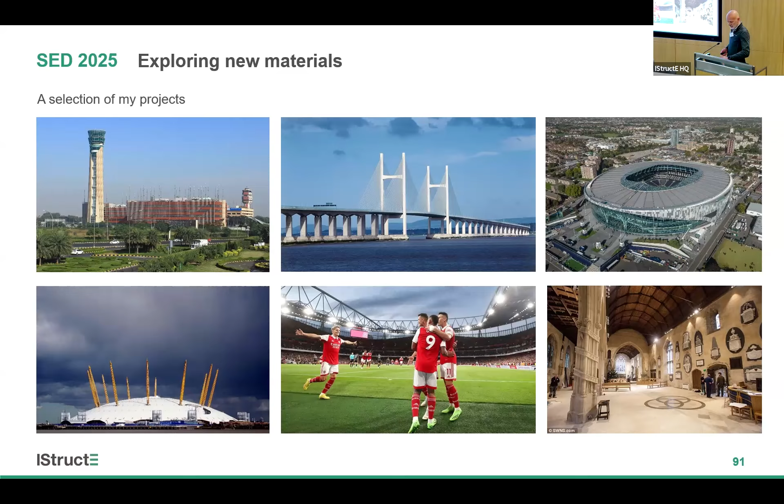So to start with, just a slide showing some of my projects, which of course I'm very proud of. Mostly concrete and steel, some timber. So that's my experience as a director at Buro Happold. But really, my curiosity around structural materials has led me to this question.

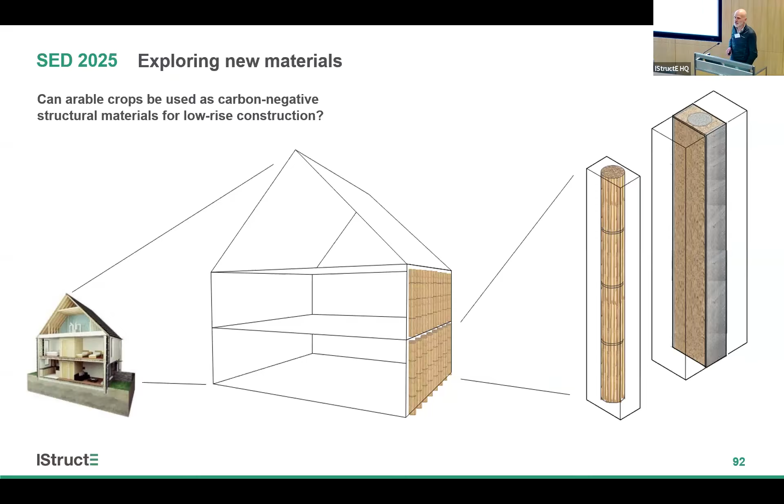And you might want to ask, well, why arable? The reason for that is that I believe it's a safer bet when we want to find materials that allow the sequestered carbon if we lock them into the building. So the graphic shows, if you like, a diagrammatic design of bundled natural arable crop, which combines both structural and thermal.

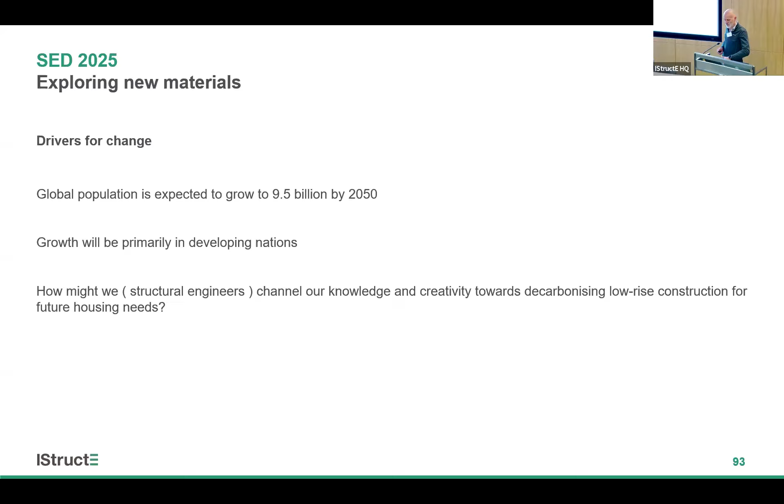So what are the drivers for change? There's going to be lots of construction in the next few decades. We know that population growth is going to rise to 9.5 billion by 2050. At least that's a projection. So that's around about the population of the UK every year for 25 years. Most of that's going to happen in developing countries. So how can we, as structural engineers, use our skills to tackle low and medium rise? Because there's going to be a lot of it.

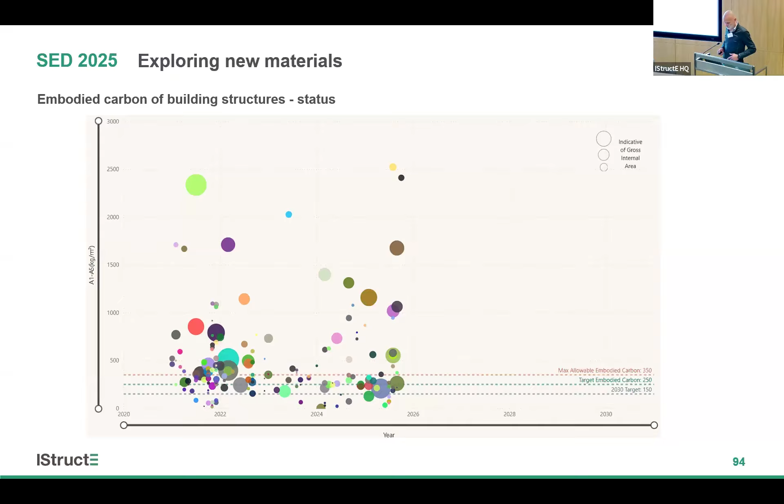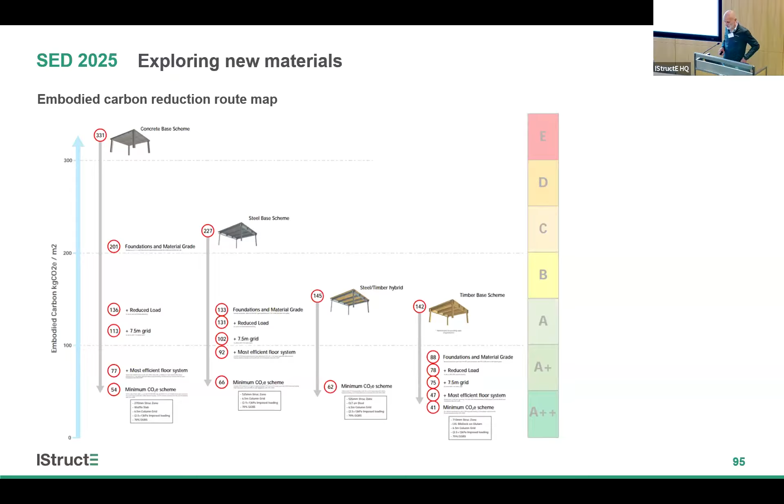Around about Engineers Declare, which was 2019, we started to strengthen our links with academia. For me personally, that was with my local university up at Bath. I set up a research pilot whereby we suggested dissertation titles for students and then supervised those students. We also set up a facility for employees to undertake PhDs, which has gone very well. And I do believe that industry and academia need to work together to tackle climate change.

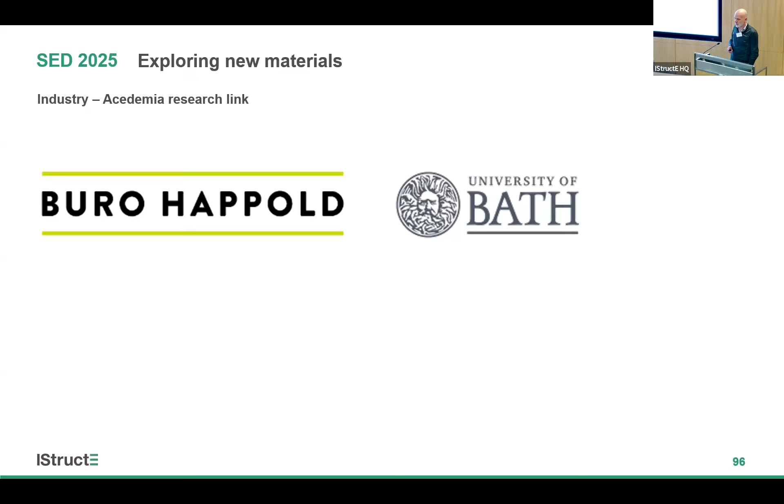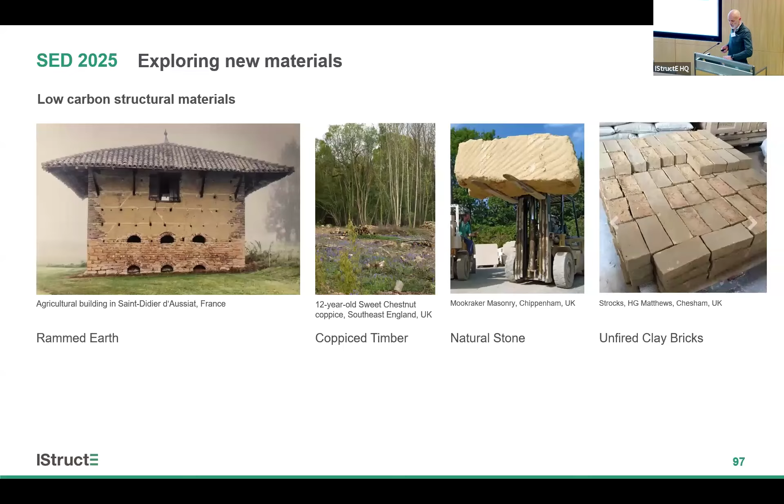At the same time, I decided to reduce my hours and started working part-time for a number of reasons, but one of them so that I could explore natural materials. So what are those natural materials? Current options, we've all heard about them: rammed earth, coppice timber, natural stone, unfired clay bricks. There are others, and we should be pursuing these. But even these have a carbon and biodiversity footprint.

And then when we look at timber, I've just been having an interesting conversation about whether we can include the sequestered carbon in timber. Our approach is that we don't include sequestered carbon, but I know that it's a topic for debate. If you haven't already read Will Hawkins' report on timber and carbon sequestration, it's really good. It's worth a read. It's on the IStructE website.

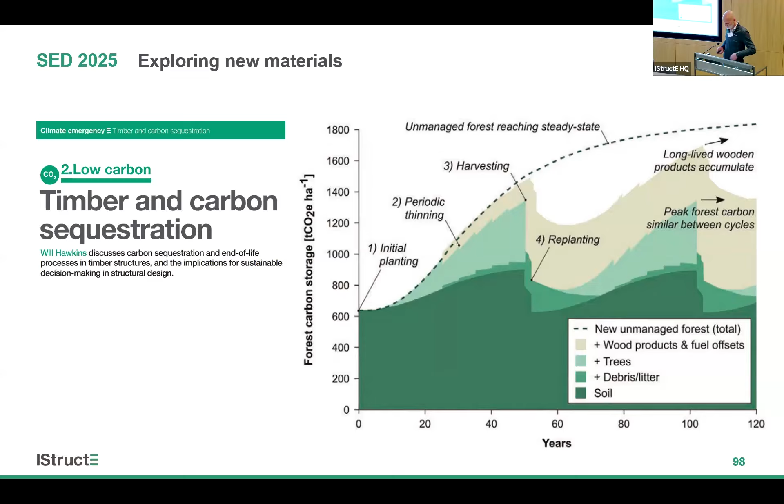And then when we look at regenerative design, that steers us to ask this question: how do we regenerate climate and biodiversity loss? How can we reverse that? Not only reduce, how do we reverse that? That's a hard question, but we have to try and find solutions.

Most of our materials are in the bottom left quadrant, even the green and sustainability movement. If we take those approaches, we're still in the bottom left quadrant. How do we move up into the top right quadrant? And my interest, if we just look at materials, is what materials might occupy that top right quadrant? I think plant-based materials are the obvious answer to that, and so that's been my focus in recent years.

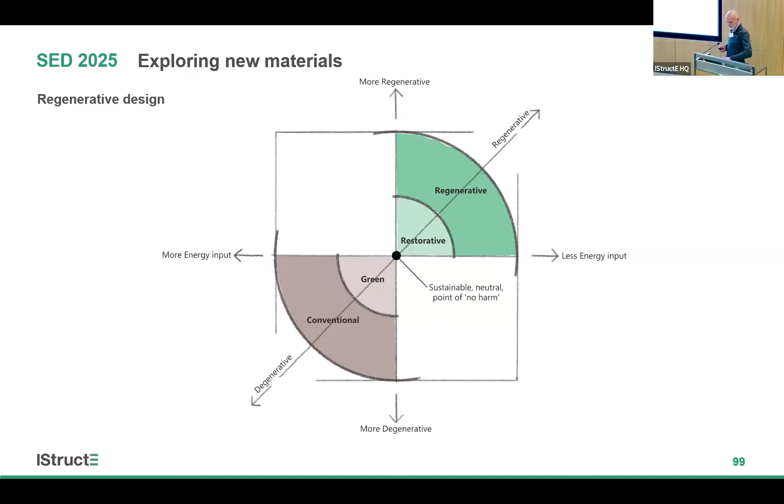So what are the precedents that we can look at for plant-based structures? The Iraqi marsh Arabs, amazing parabolic structures using reeds for thousands of years, really interesting. And then other indigenous communities around the world, South America, Peru, have similar structures using reed, Africa. And then more recently, we see these structures using canes and bamboo, and of course we all know the Arc project, but bamboo isn't naturally durable.

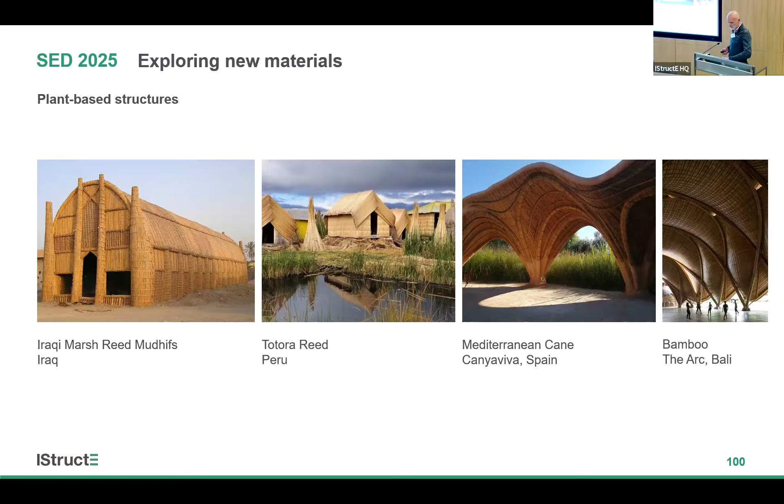So how about the crops in this country that we are familiar with? Of course we know about straw, but we can't really take straw as a serious contender structurally. And then of course there's been a lot of interest recently in hemp, and quite rightly so, but it's quite soft, and actually under sustained load it strains a long way, so it's not really going to give us the answers that we need.

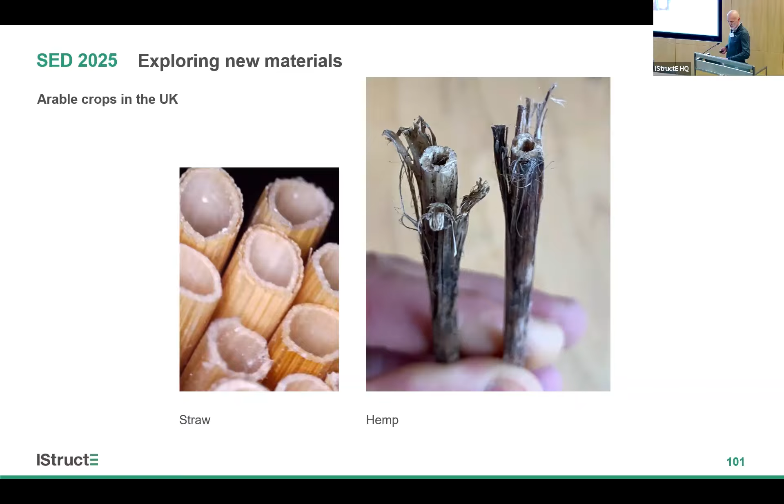So miscanthus, this is the material that I've been focusing on. It's growing in popularity in the UK. First came to the UK probably 20 or so years ago as a biofuel. More recently as a growing market as animal bedding, chopped up and used as animal bedding. And as I said, this has been my focus, and hopefully will be my focus for the coming years.

So what is it? So this graphic just looks at a comparison with bamboo. So a small stalk of bamboo. So bamboo is hollow in the center. It has this outer timber-like structure. It's strong. It's not durable. Hemp is insulating, it's not strong, it's not durable. Miscanthus kind of combines the two. It has this outer cylinder of timber-like structure, so it's hard, and it has this inner shiv-like insulating material, and it is durable.

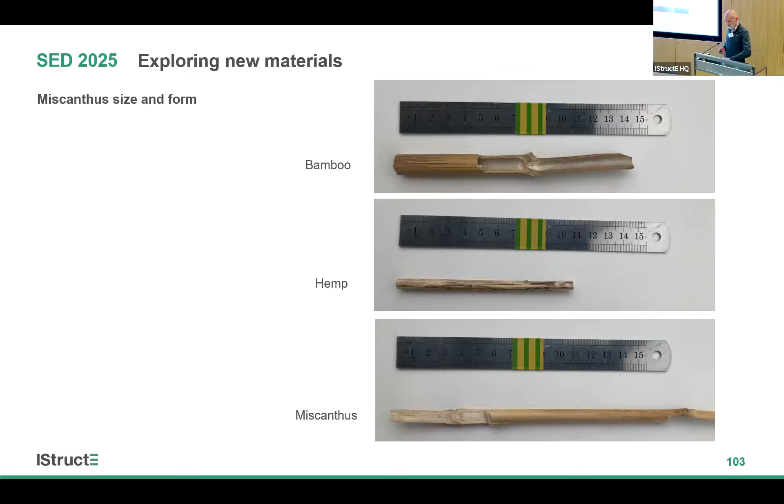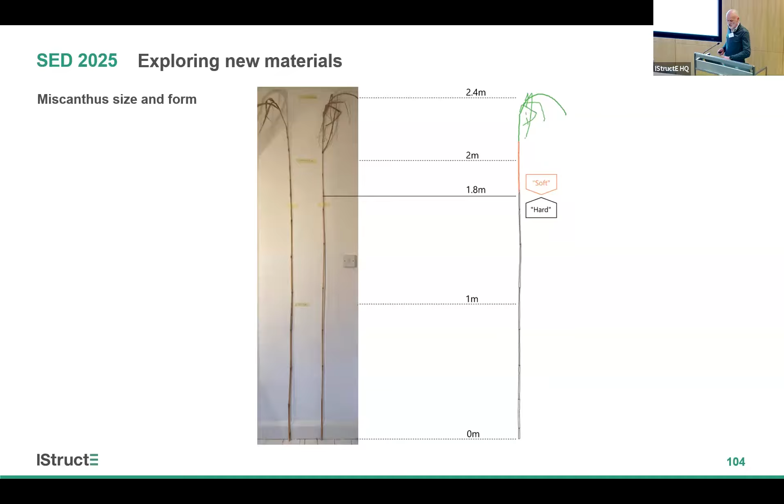So it grows to around about 2.4 meters in this country, 2.4 to 3 meters-ish. And around about 1.8 meters of that is usable, i.e. it's hard. The top section is quite soft. It's part of the C4 photosynthesis group, which means that it photosynthesizes almost twice as fast as other plants. It's a coppice crop, which means that the rhizome roots stay in the ground. Every year it gets harvested, and those sequester carbon into the ground as well as the stalk. And then next year, the crop grows from the rhizome roots.

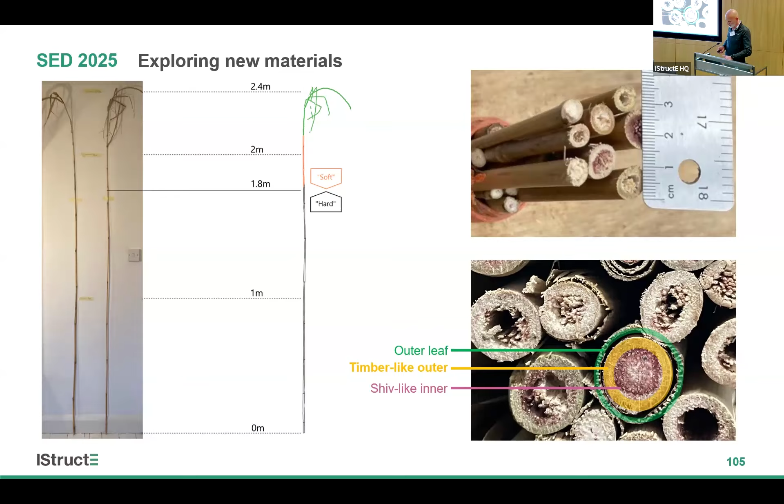In cross-section, it looks like this. The stalks are around about a centimetre or so. And you can see there in the graphic, there's a kind of green outer leaf, which comes off quite easily. And then you're left with a timber-like outer cylinder. It looks very similar to bamboo. In fact, it looks identical to bamboo. But inside you have this insulating shiv.

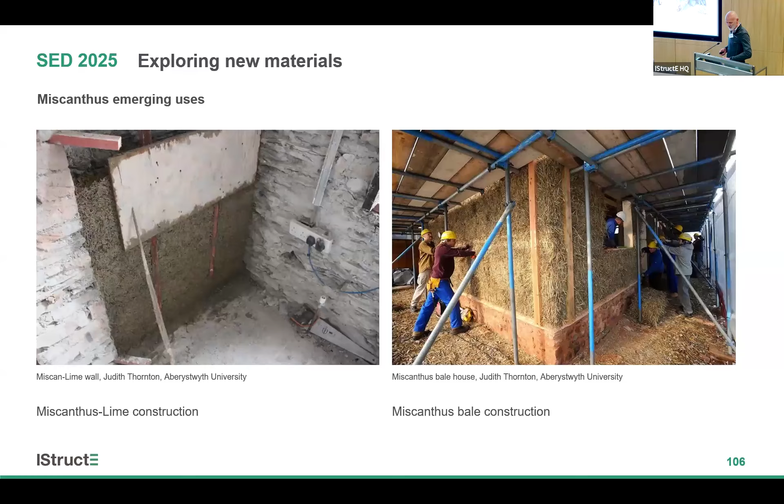There are some good historical precedents of its use. The Japanese have been using it for thousands of years as roofing thatch. Also, Japan has a damp marine environment similar to our own, and it's very good in damp conditions. It has enough lignin and silica in it to make it naturally durable.

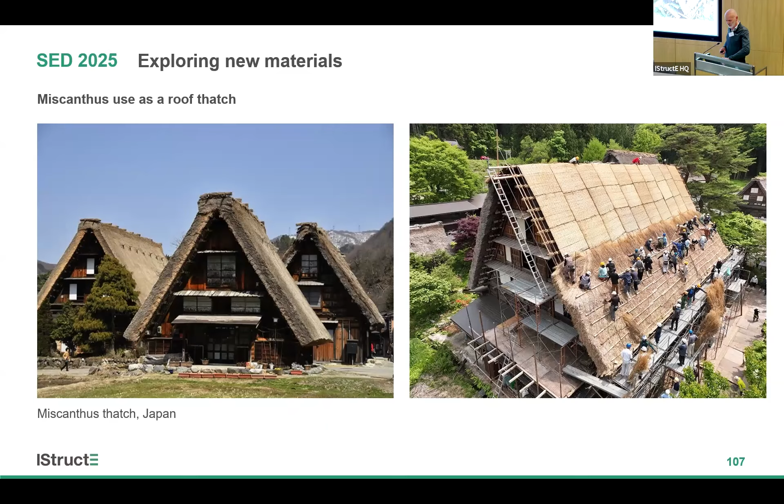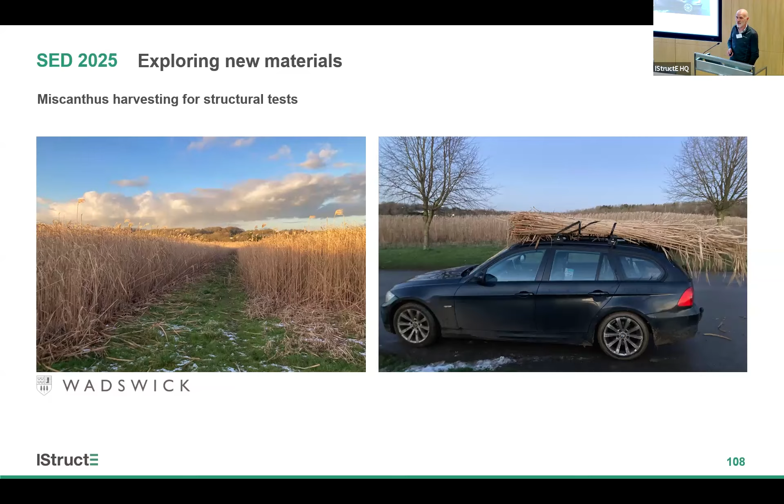So around about this time last year, I set about harvesting some miscanthus to play around with it, and found a miscanthus farm about 7 miles from my house, Wadswick in Corsham, Wiltshire. And they were very happy for me to have some, although puzzled as to why I wanted it. And then I went about drying it for a few months, and thanks to my wife and kids for allowing me to lay miscanthus out on our underfloor heating.

So we dried it and tested it in actually my greenhouse to begin with, just some fairly rudimentary tests. And so this shows the test of 8 upper stalks and 8 lower stalks, bound together with polypropylene confinement, tight, just to understand whether I could transfer the load through friction, and managed to hold a kilonewton of load on the 8 stalks before it started to slip. So that kind of gave me confidence that, okay, this potentially is a material that we could use.

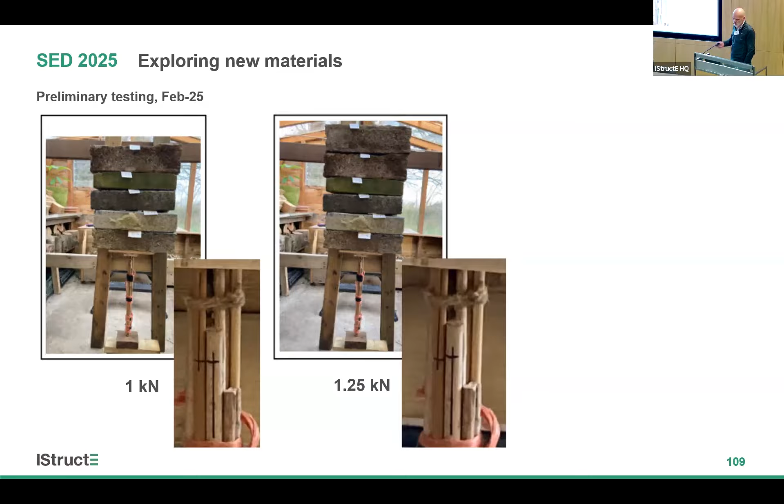And so then I suggested it as a dissertation topic, going back to the Bath University link. And so the dissertation student took some tests with my supervision. This is just one of the tests. So this is just a simple single stalk. You can see the wood-like fibre at the top right, the failure. We managed to generate 3 kilonewtons of load, which is actually quite a lot of load. And when you spread that over the wood-like outer cylinder, that equates to around about 50 to 75 megapascals. So actually it's quite a high stress.

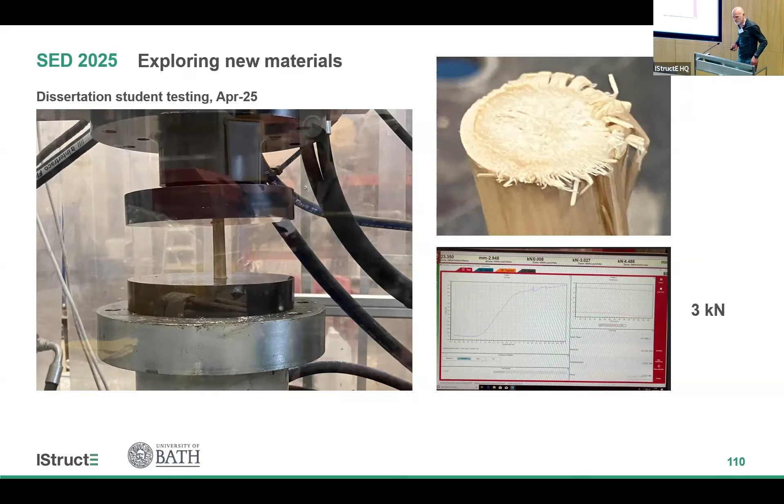And then we also did bundled tests, and these weren't successful. Well, only in that we realized actually each individual stalk was buckling individually, and the sisal confinement that we were using just wasn't doing the job of helping those stalks to work together as a whole. So somehow we needed to improve the interface friction.

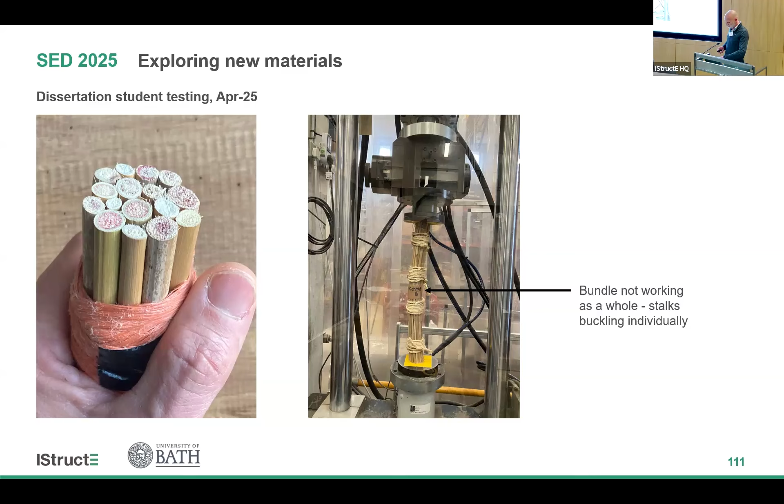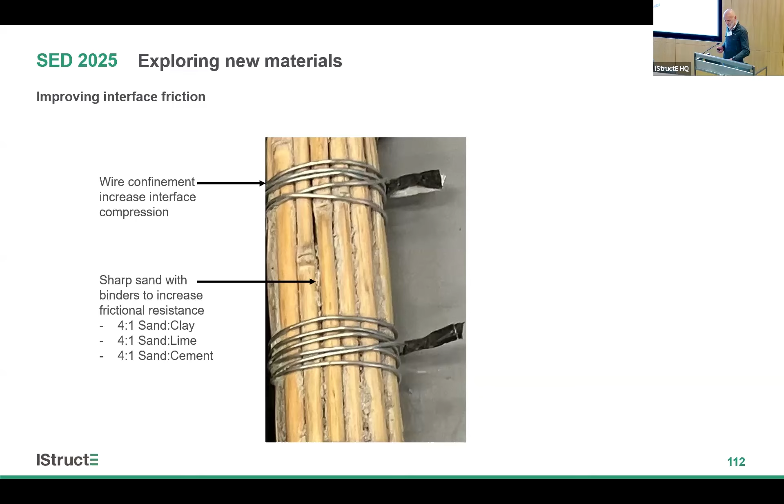And then this summer and autumn, in fact only very recently, we've run some more tests, and we spent a few months trying to work out how to improve the confinement. We came up with a tensioned wire system, works really well, digs into the wall of the miscanthus on the outside and really compresses the bundle. So that works really well. And we also wanted to include sharp sand in the interface between the stalks. And obviously we needed to hold that sharp sand in, so we used a binder. We used 3 different types of binder: clay, lime, and cement.

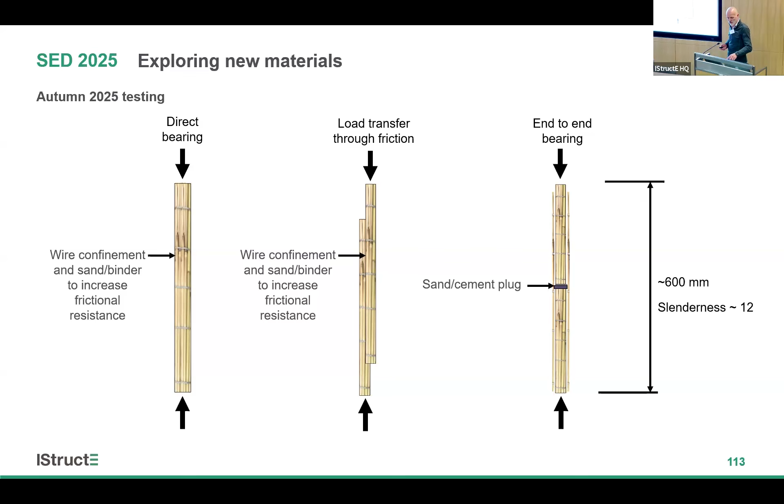And we undertook 3 basic tests. The first one was direct bearing, just stalks from top to bottom, again with sand binder within. And the second test was a friction test. So we had a bundle at the top, bundle at the bottom, interlocking, so the load transferred through friction, through the sharp sand and the confinement. And then the third test was just a simple end-on-end bearing with a sand cement plug. These are the test samples, and these are the results.

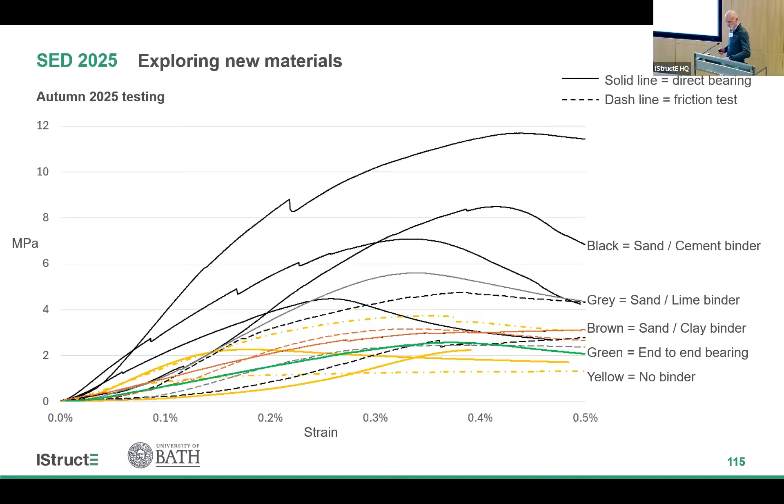So on the left-hand side, we have megapascals. X-axis is strain. Solid lines were the direct bearing tests. The dashed lines were the friction tests. So as you can see and expect, the solid lines, the direct bearing tests, were obviously better. The dark black lines are using cement binder. We're not serious about cement binder, but we wanted to use it to try and get a feel for how the strength of the binder changed the result.

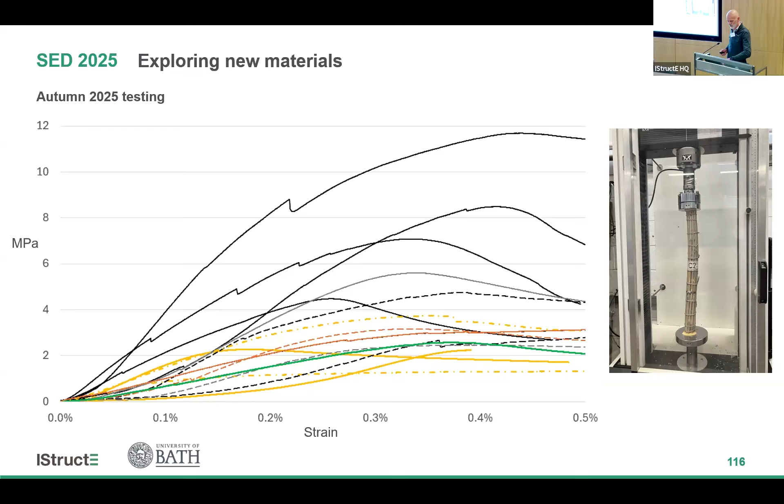And all of the tests failed in buckling, and actually that was quite encouraging, because what that means is when these bundles, you can imagine them being part of a building, part of a wall, the fact that they're joined together adjacent to each other is going to increase their buckling resistance. So these allowable stresses will probably increase.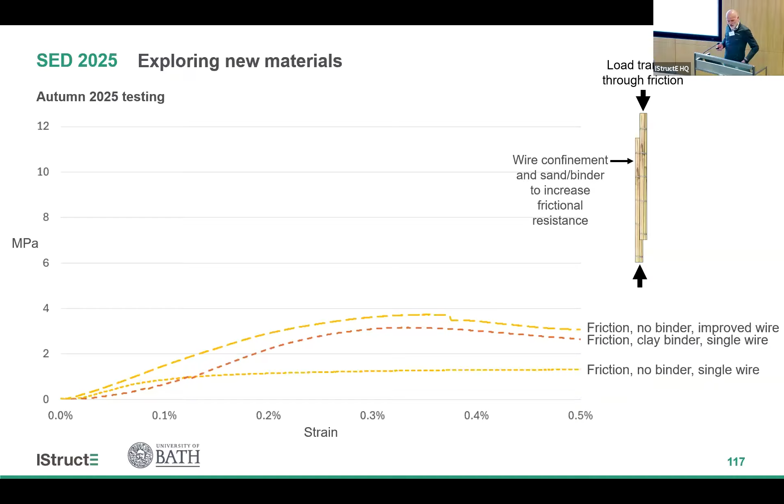So let's just put that into context. How much stress would a 2 to 3 storey resi building put on a 300 millimeter wide wall? And actually it's quite small. It's very small, around about 0.1 megapascals. So actually the loads that we were getting out of Miscanthus are way in excess of the kinds of loads that we would expect, which is good.

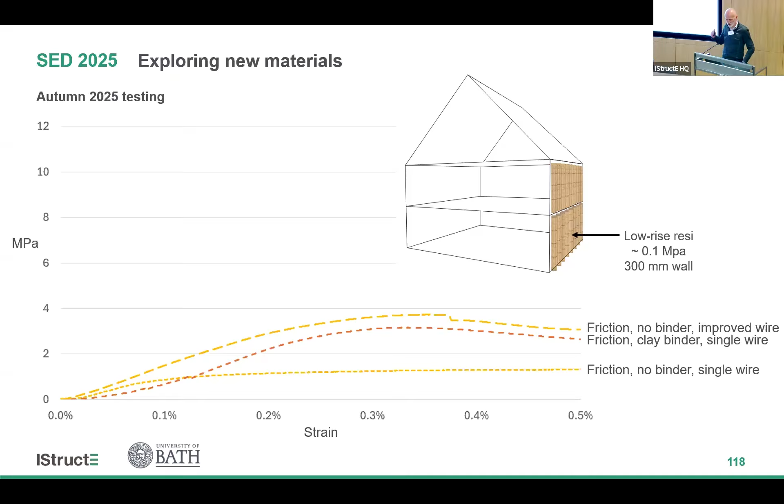Just again, putting it into context, rammed earth is considered to be around about 1.5 to 2 megapascals. So the line at the top there is double that. So not bad. We also did thermal conductivity tests, and the result of that is that actually, yes, pretty good, as we expected. Very similar to straw bale and hempcrete.

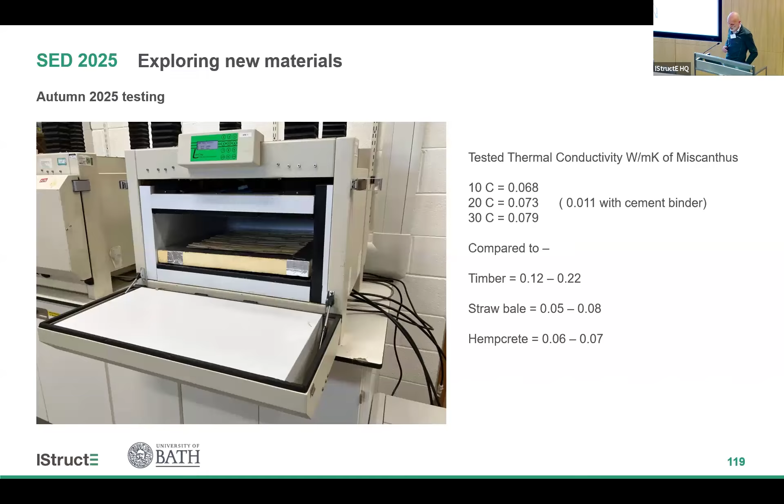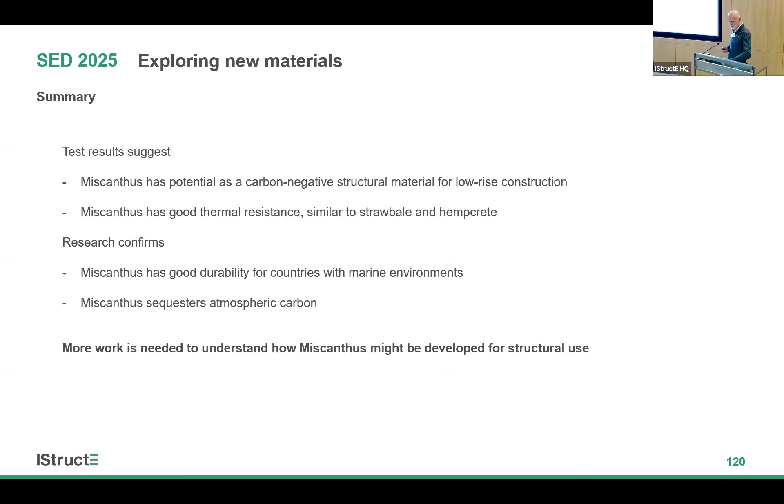So, in summary, it is a potential material for structural use in the future. Obviously, there needs to be more work done. It has good thermal resistance. It has very good inherent durability. And we can use the sequestered carbon because it's an annual crop. There is more work to be done.

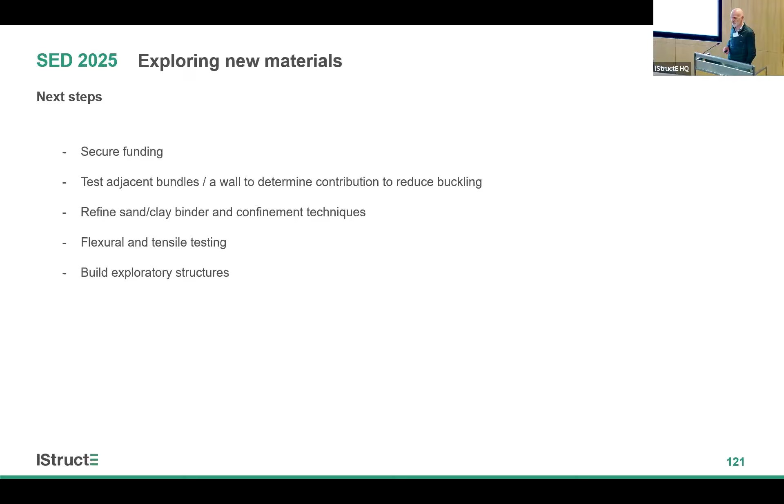So the next steps: first of all, I need to secure funding for the next stage of the project. And we'll be doing more tests, bending tests, tensile tests, and also looking at the buckling resistance. And we also plan to construct exploratory structures. There we are.

Thank you, Julian. I think that presentation is really inspiring in the sense of how your personal curiosity in a material has allowed you to explore it and actually develop an innovation. So we all have to have that little curiosity and exploration in our work as well as engineers.

So on to our next speaker. Annalisa presented us the issues of the wider landscape and responsible timber sourcing. We're now going to take this back home with Tom Henderson from Wood Knowledge Wales, and Tom's going to cover how we can create local supply chains in the UK.

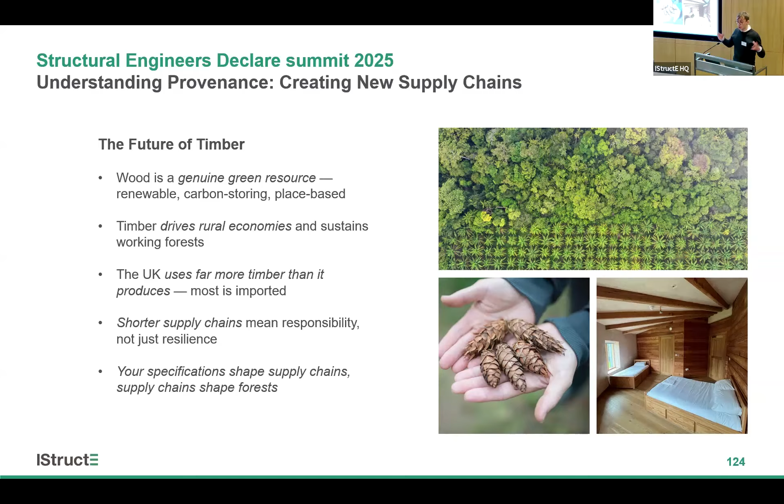But so there's a definite disconnect, and we believe you guys have the power. So we can grow the trees, and we can research forest ecology and carbon dynamics till the cows come home, but there are gaps in this supply chain that require us all to work together, and that's what I'd like to encourage us to do.

So a lovely picture of a forest here. This is the start of the timber supply chain in the UK, and this is a pretty typical forest. I don't know how many of you spend a lot of time in forests, but this is what productive forestry in the UK really looks like. So we've got, this is a forest near Llandegfan, just south of where I live. These are productive conifers on the right, Sitka spruce, Douglas fir. When we talk about timber in construction, this is generally what we mean, coniferous trees. They grow faster, they grow straighter.

Over here, in our typical woodland, we have a broadleaf component. Now this isn't the sort of timber that we're used to in the built environment, and it isn't by accident either. All forestry in the UK is governed by the UKFS, the UK Forestry Standard, which is quite an extensive list of rules about what you can and can't do, and guidance about what you should and shouldn't do. It applies to every forest in the UK.

So if I can dispel this rumour straight out the gate that plantation forests are ecological deserts, I'd like to do that. This is what it looks like, and I know because I took that photo.

The UK Forestry Standard gives us a baseline as well. It's all about making sure that sustainable forest management incorporates this element of timber production. So we're getting material out of the woodland, but it makes sure that it does it in line with other goals - this could be ecological goals. You can see a track here through the middle. Recreation is a massive part of UK forestry. Foresters are always encouraged to open the woodlands up wherever possible.

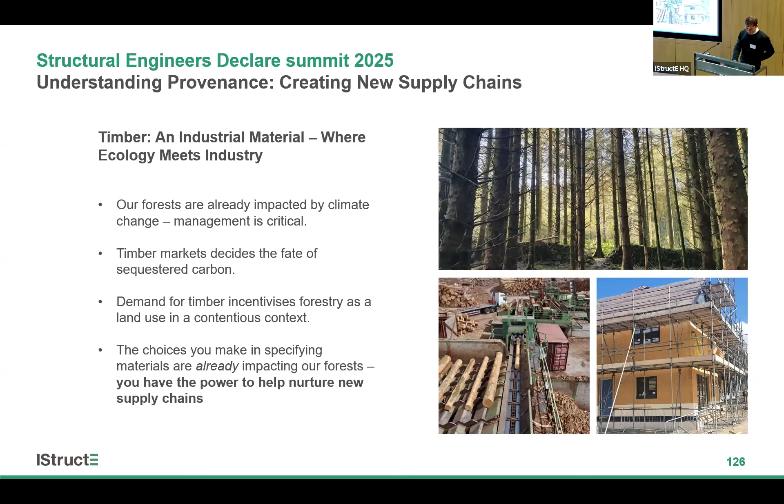Which means their timber grows slower. It takes about twice the time to reach the same height as the same species would here, spruces, firs, that sort of thing. Now there's some misconceptions about what that does to its strength. The slower growing means the tree grows less as a youth, so essentially it has a smaller juvenile core. This juvenile core makes the timber unstable. So the difference between C16, that was mentioned, and C24 is not necessarily strength, it's stability.

The colder climates in Europe produce high quantities of C24 grade spruce, whereas we produce C16.

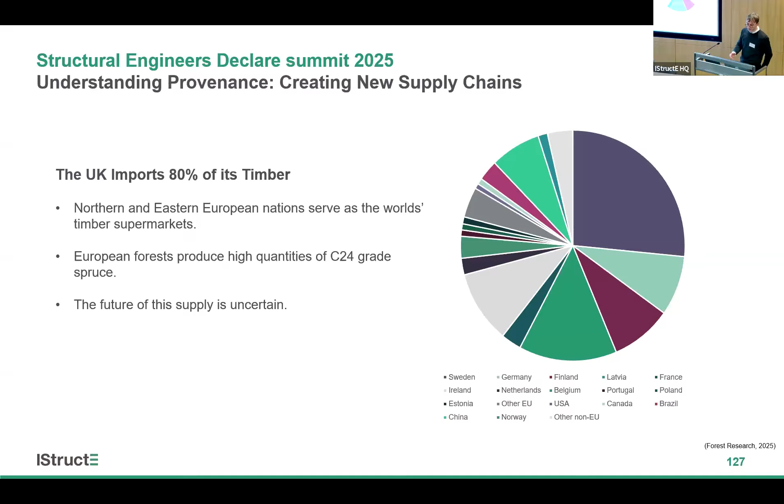And what we're seeing is sanitation fellings. So the forests are threatened by pest and disease, so the forester will go in and remove all the timber preemptively so that it doesn't get diseased. So the future of these forests is precarious.

What about our own forests? We produce quite a lot of timber, 10 million tons, which is quite a lot. For reference, we use about 6 million meters cubed in the built environment in the UK. So technically we could do it. We do produce enough timber to supply our own construction demands, but that's not what happens.

This is a Sankey diagram, a bit of a rough estimation of what happens to timber that comes out of our woodlands. We harvest it, about 60% goes to sawmills, a lot goes to energy, bioenergy production. Once it gets to the sawmills, it's sorted between green logs, red logs. But essentially, by the time you get to the end, only 8.5% of the harvest ends up as structural building material. Most of what we produce in the UK goes to fencing and biomass.

And there is a reason for that, and essentially the reason is because timber is a global commodity product, so we can explore that a bit more. Timber's traded as a global commodity, which means the breakouts from the sawmills, the products they produce, are ultimately decided in markets. If large sawmills, who process 90% of the timber, decide that there's a market for something, they'll produce it. It's as simple as that.

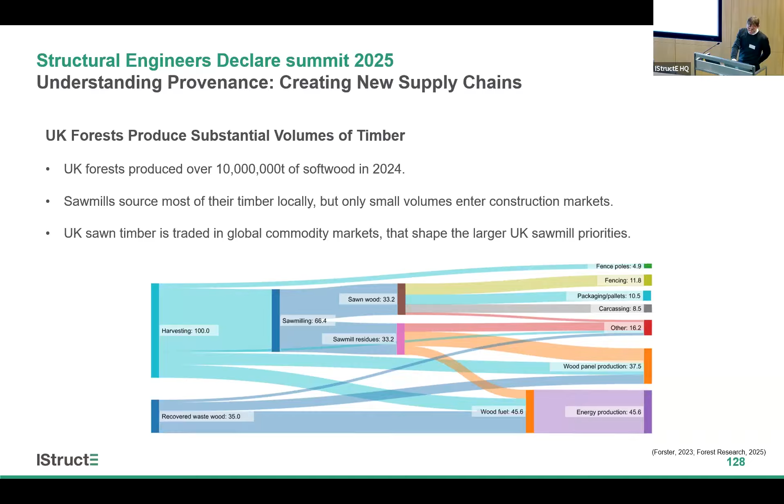So we reached out to some structural engineers and tried to work out: why don't you use timber in the built environment? These are just some of the questions or statements that we got back.

The first one: we don't grow the kind of timber that you can build with in the UK, which is something I've kind of heard. But that's not true. We produce C16. Now, Timber Development UK, just this week, before I had a chance to update this, actually announced that they've unveiled a new campaign for C16. So Timber Development UK are convinced of the properties of C16 and that it's more than suitable for this sort of low-rise, mid-rise construction that we do here in the UK.

So it's not that we don't grow the timber, we don't use it. Timber is old tech and old-fashioned, and I think this uncovered a deeper, perennial issue in sustainability: that we tend to err on the side of innovation. There are a lot of timber building methods which at one point were called modern methods of construction, but the systems are in place. We know how to build with timber, so we think there's a bit of a warning: sometimes these highly advanced systems are a bit of a red herring. It's actually about rolling out what we know we can do.

Timber framed houses are unsuitable for the UK climate. This is an interesting one because I heard earlier someone mentioned moisture. Now, I'm assured by my structural engineer colleagues, this comes from a whole bunch of houses that were built after the Second World War, which were structurally unsound and unfit for purpose. And it created a lot of fear about fire and fire resistance. Now, we know that timber actually chars where steel will melt and bend, so I think that the fire resistance claims have been quashed.

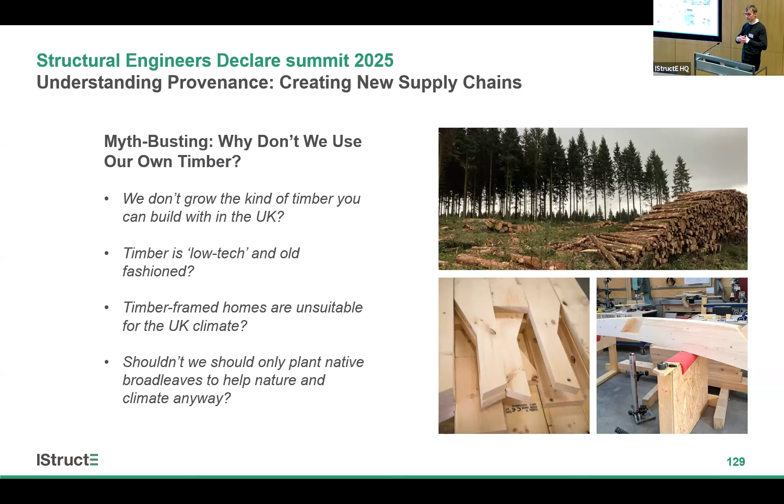And finally, shouldn't we only plant native broadleaves to help nature and the climate anyway? No, in short. So this goes back to that picture of the forest together. What we think is, because timber and sustainable forestry in the UK is mandated by the UKFS, and we know it's going on, it offers an opportunity for a more integrated approach to sustainability. It's not about offsetting the damage somewhere else. It's about developing integrated systems and a more holistic approach to sustainability.

So we have to get comfortable with building with timber. Rather, you have to get comfortable with building with timber. Sorry. The engineers we spoke to said they felt it was a far off and mystical material, which is wonderful, and I agree, it is mystical. But far off, it is not. Like I say, sometimes we're misled by some pursuit of innovation where what we have will do just fine.

The industry is upside down. It designs first and looks at sourcing materials after. I can't speak to this because I'm not a structural engineer, but I'm hoping if you can come away from this with one thing, that's what I'd like you to think about. We talk about material resource scarcity, and not all timbers are created equal because of ecosystem services. Where the forest is has a massive impact on the benefits that people receive from those forests.

So we'd like you to consider that and to start with what we have, and then try to design systems that work with what we have. So this is about building with C16 and not just speccing towards C24. Just this morning, I've seen a coffee table stand with C24 printed on it. So it's again, another perennial issue.

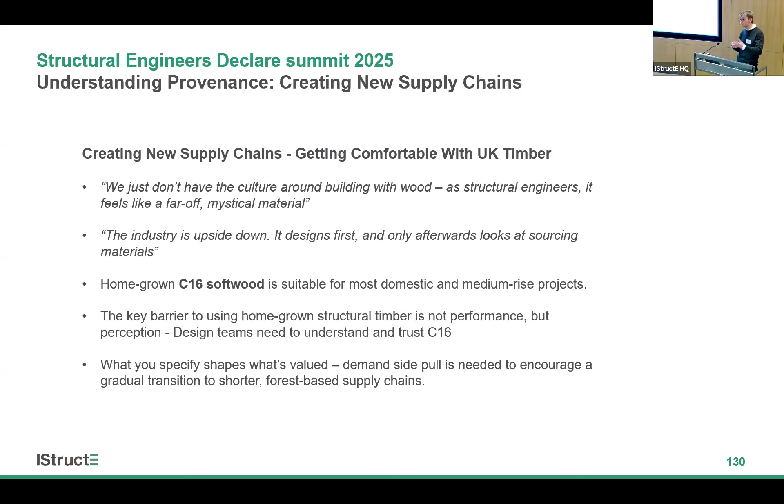Ultimately, we think that the barriers to C16 are about perception. It's not about the structural integrity of C16. It's not about producing C16 domestically. It's about the way that designers and the people who specify timber perceive UK timber. And we are working, and Timber Development UK are working, to change that as well.

So what can we do? I'll gloss over a bit in the interest of speed, but we think there's a real gap for skills, training and education. We think that timber needs to be a more fundamental part of structural engineers' education. A lot of the conversations we had were the first conversations that the structural engineers had about timber in a serious professional context.

So something we can do to move towards using more C16 is growing relationships. I talk about the big sawmills, and the big sawmills put all of our timber into pallets and packaging, which is true, but there's another side to the story. There's a constellation of small sawmills in the UK. This is a guy with a saw bench or a guy who employs his son. There's a lot of this. It's kind of shed industry stuff.

But what they do is they know every tree in the local forest, and they'll liaise with a client a lot of the time. And it creates this sort of shortened, usually for bespoke application, but this shortened supply chain. And we think something we can do pragmatically and practically is by nurturing those smaller processes from the ground up. We can't expect the big sawmills to change their output overnight because they compete with global commodity markets, but we can nurture the small sawmills.

But that means building relationships. These guys don't have websites. You've got to go and know. Yeah.

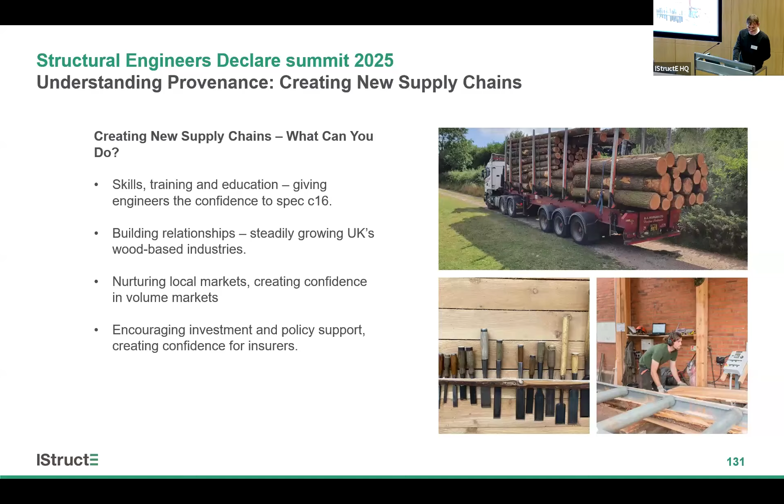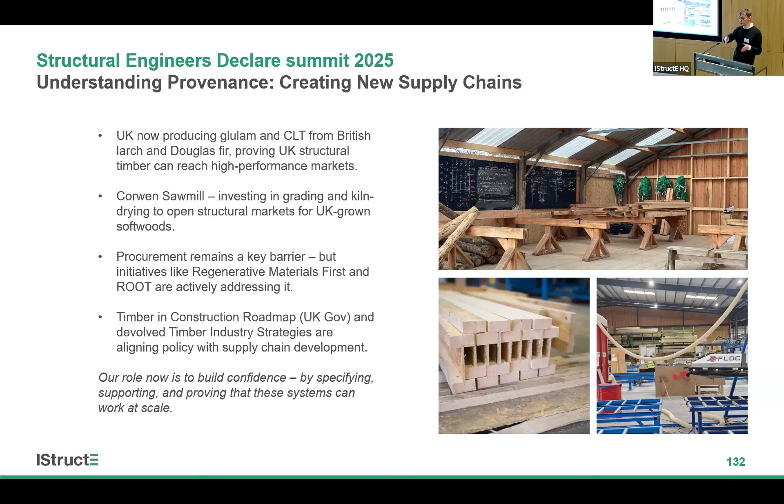Okay, so just to kind of finish off, we are doing quite a lot, and it's not doom and gloom. It's very easy to look at those big mill stats and think, well, what are we going to do? But we actually do produce some engineered timber as well, cross-laminated timber. These are sort of mass timber engineering solutions I'm sure you know all about. So we are now producing British CLT from British logs. That's actually helping us deal with the larch crisis as well, which you can ask me about. Corwen Sawmill, just another example of a sawmill, that small family-run local business who are investing in secondary processing machinery that allows them to access construction markets.

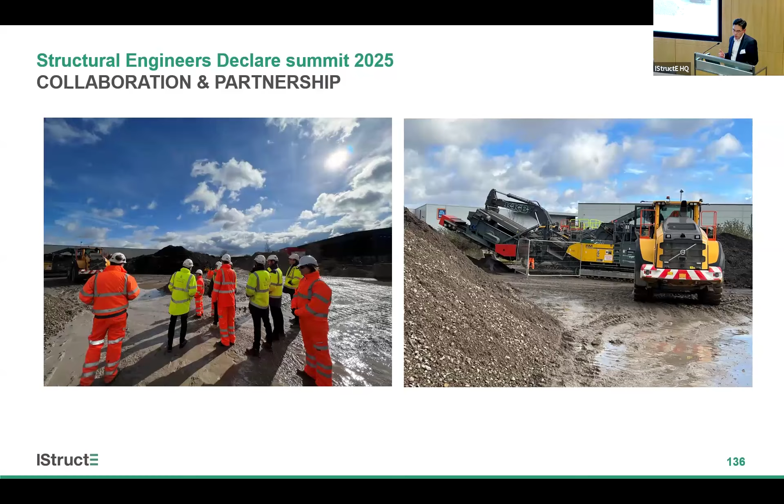And what they were doing was generating recycled aggregate from waste. Because of the group that we had, we were working on a project where we were demolishing a lot of concrete. So the idea of being able to connect people together to generate positive outcomes is key to unlocking future ways in which you can decarbonize and design things more sustainably. So it's about seizing the opportunity.

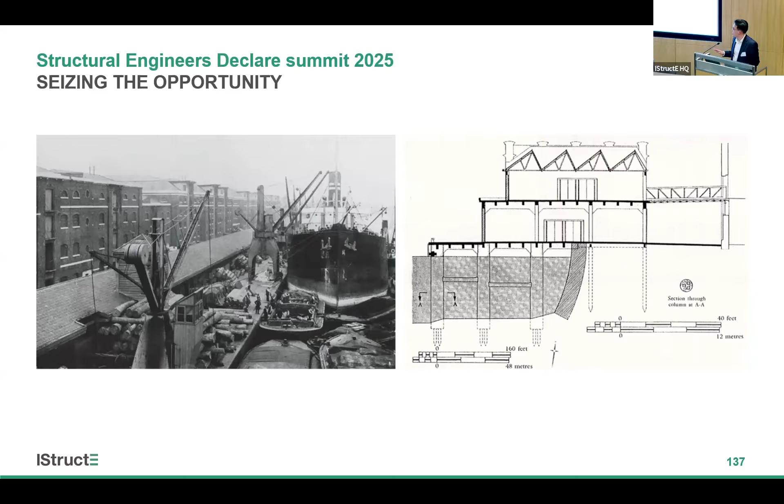So I mentioned the project that we were demolishing. That project was an existing false quay. As you can see there, the historical photo shows it being there for over 100 years. But unfortunately, we had to make way for our new development, because we were constructing a 23-story tower, which couldn't be supported by the existing false quay.

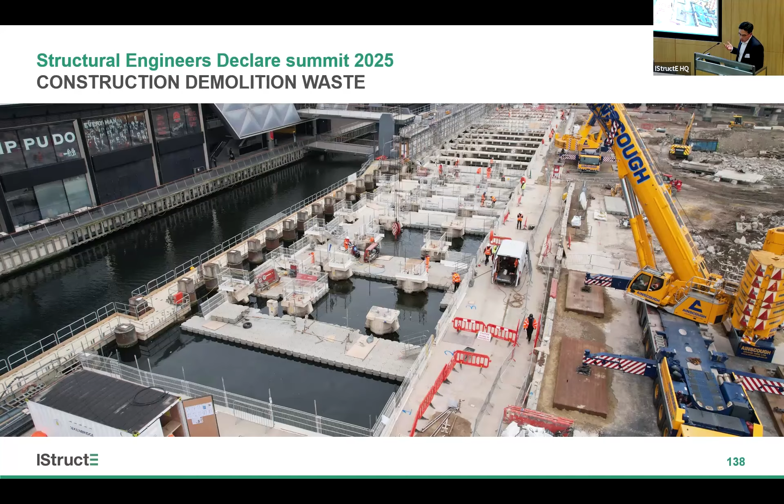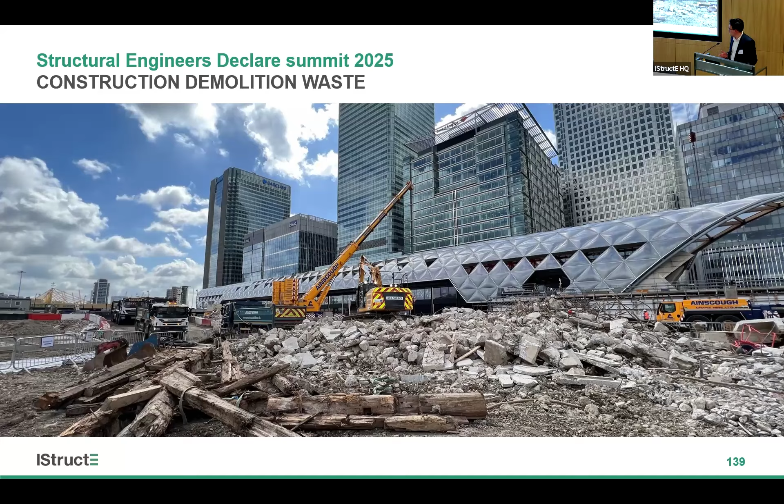As you can see there, there's a lot of work involved in demolition, and that generated a huge amount of demolition waste. At the time when we picked up on this idea, we had collected over 2,500 tons of waste concrete from demolition. That initial site visit led to us creating our own batch of recycled concrete. What you see there is the amount of recycled aggregate that we've generated from our project.

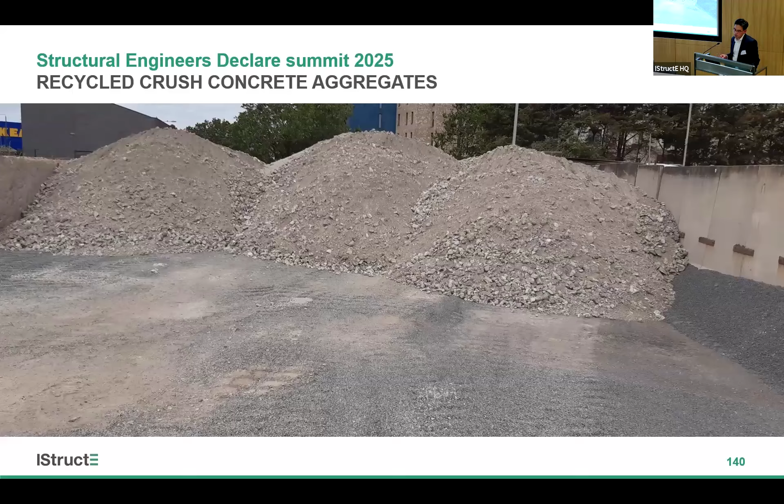And the great thing with the relationship is that we said, look, the great tagline here is if we can take a 100-year-old piece of structure that is now being demolished, and generate this new material, recycled aggregate that can then be mixed in and made into new concrete, we want that back into our project. So that completes a beautiful circularity story for us. So that happened quite quickly.

The visit was in late July, August, and by December, we were batching that same recycled aggregate back into our projects. This image here shows us at the penultimate level on one of our Wood Wharf projects with the recycled aggregate mix. We also took advantage at the time of the update in BS 8500 with the introduction of ternary blends, which involved the limestone filler. So we capitalized on all these latest developments to make it happen on our project.

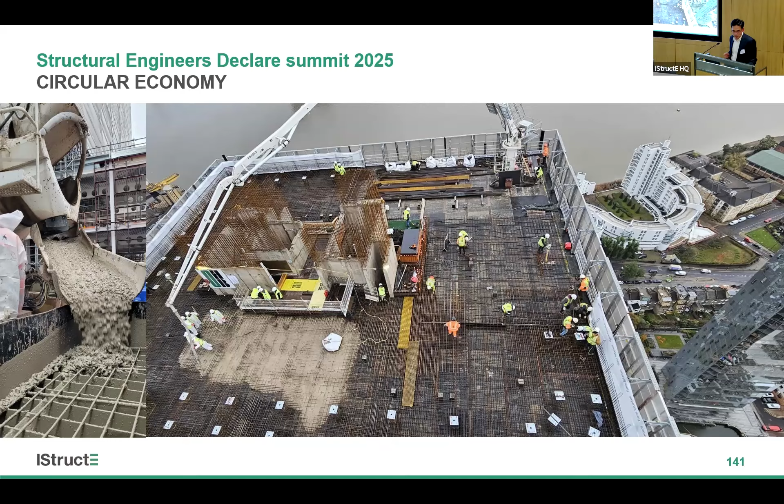Not just resting on our laurels, we wanted to investigate what we could do further with that aggregate, and we were invited to visit Neustark's installation. Neustark, if you don't know, is a Swiss startup that takes the off gas from biogas plants. You can see there the waste gas is captured by a filter that's funneled through all these amazing pipe works to their container, where they have this amazing gadget that condenses and freezes that gas into a liquid so that they can containerize it and ship it to a concrete batching plant.

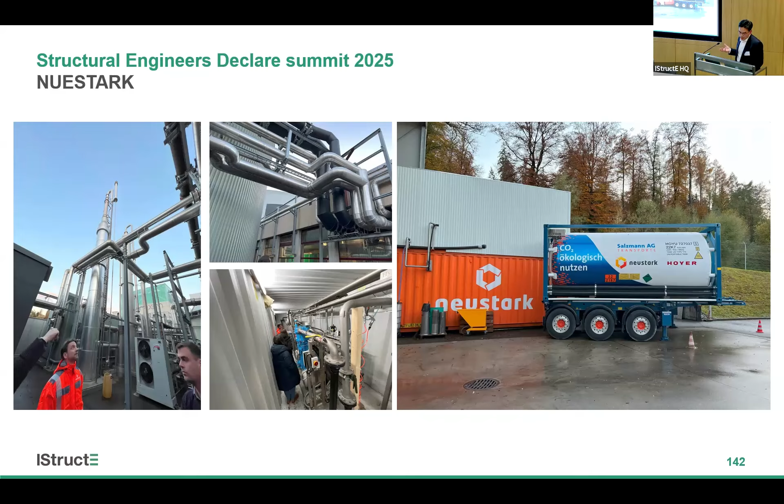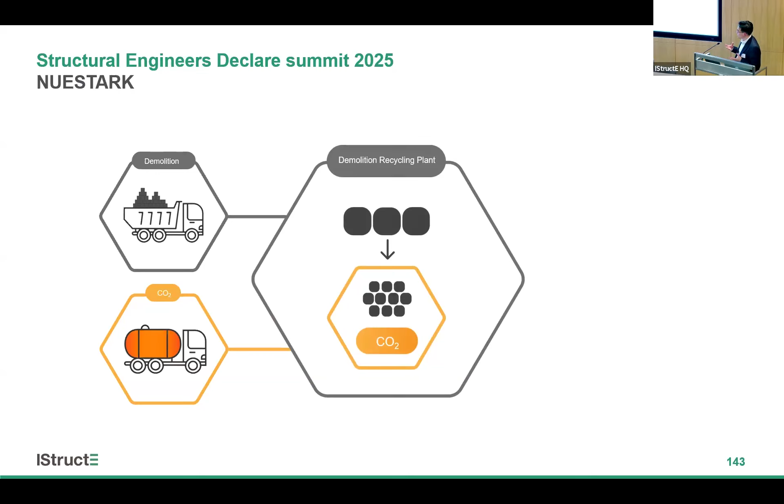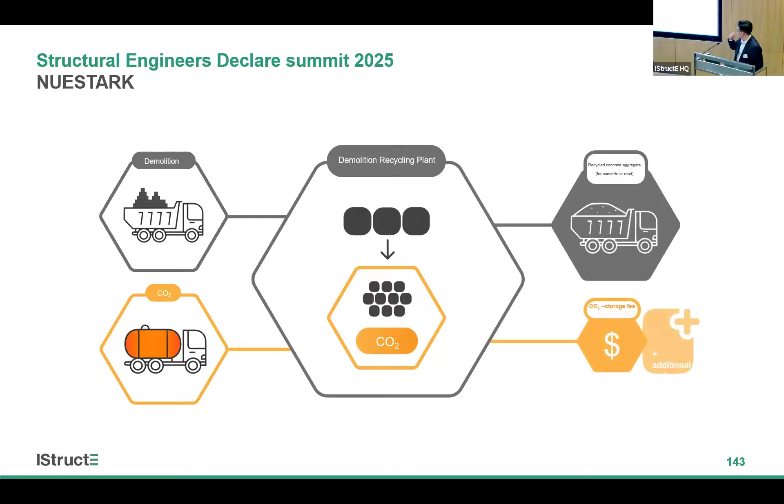Their model is by taking the demolition waste and capturing CO2 and combining them together, you can sequester the CO2 taken from that waste gas, and basically bake it into the recycled aggregate. That permanently locks the CO2 in the aggregate, and you can blend that to make concrete, and from this positively offset carbon.

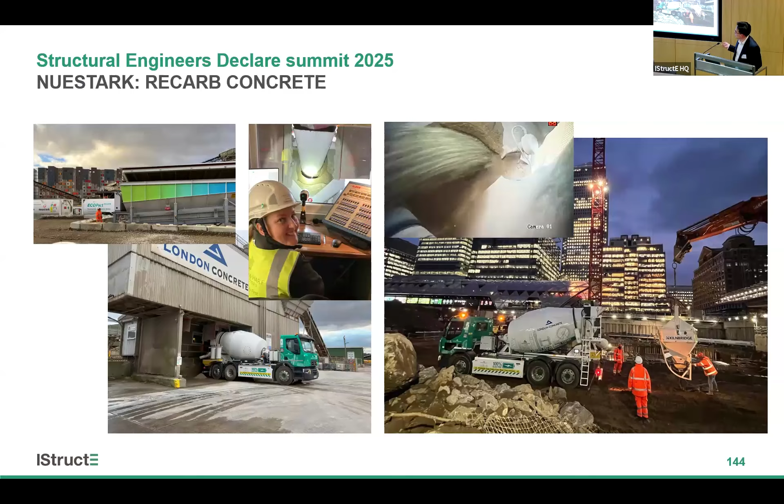So this kind of tagline is really, really important, and this story and this messaging needs to be conveyed to developers who don't quite understand the engineering purposes. And this is the kind of playbook that you have to do within a development company to get them excited and interested in embracing these innovative ideas into engineering and design.

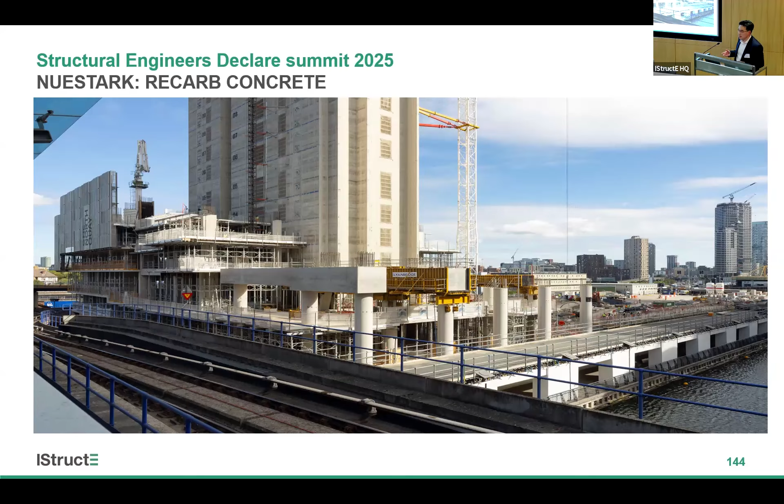Another material that we've been investigating and trialing is biochar, and this is quite an interesting material. So we were approached over a year ago about biochar and how that could be used in concrete. So, being an inquisitive engineer, we said, well, how do you make biochar, what is it, and what's the process? What it is, is taking biomass, and in this case it's wooden waste, coppice, timber, which chimes in with the theme that we've got today.

So by taking that biomass and putting it through a process of pyrolysis, you capture the CO2 in that organic material, which, if left to biodegrade, would release back into the atmosphere. Pyrolysis suspends that process by converting that material into a charcoal material called biochar. And by grinding it into a powder, you can mix it into concrete.

So we challenged that idea and said, well, if you can make it from any biomass, could you potentially make it from Canary Wharf coffee grounds? Because we're not just a developer, we control and manage the entire estate. We have a lot of coffee shops. So we pushed that idea forward. They were happy to take a wheelie bin. They tested it and said, oh, we can make biochar from your coffee grounds.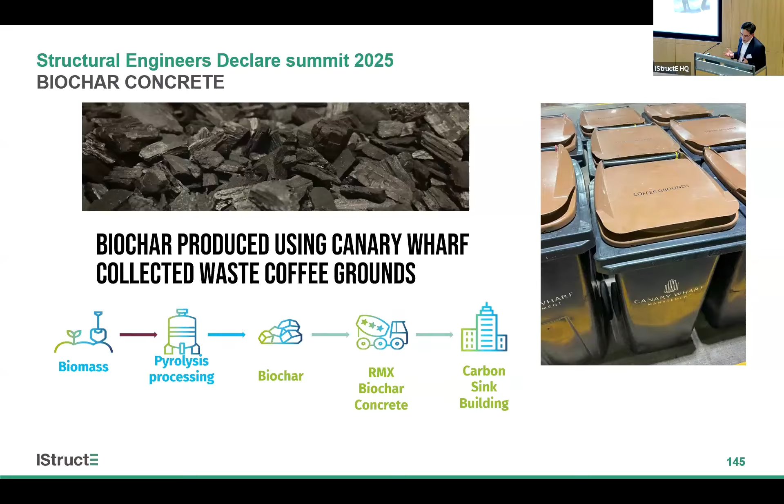So it's a great idea, and this relationship that we have with our supply chain and this engagement is how we can unlock these ideas where people are reserved and holding back, to say, well, look, tell us about it. We can see how we can apply it. So taking this idea forward by saying, look, we can make biochar from our coffee grounds, we've got a perfect project where we can potentially showcase how it can all come together.

So this is Whale on the Wharf. And the story behind this is this sculpture piece, this art piece, has been created from the ocean plastic waste that's been collected. And it's been made into this fantastic full-size blue whale breaching out of the water. It's been on display around the world as a temporary installation. And Canary Wharf, as we do, decided to buy the art piece and give it a permanent home.

So the challenge came to me as the engineer: can we put it in the dock? And I said, well, where do you want it? Oh, we want it here in the deepest part of the dock in the estate. So it was a real key engineering challenge to support this and put it into this prominent location on our estate.

So the team that we had was a great team. We all banded together and said, well, look, if we're going to take on this project, we need to think sustainably and use the right materials and produce a solution that really fully displays how you can come together and bring circularity to fruition.

So we had the biochar concrete that was used to form the pad foundation to support the frame, and the frame itself was designed using reclaimed steel. So that has helped us keep the embodied carbon of this project as low as possible. And now we've got this beautiful art piece that everybody can come and enjoy, and there's a plaque that gives you the background story to blend all that effort and idea together. So I think it's come full circle for it to be here at Canary Wharf with this complete story.

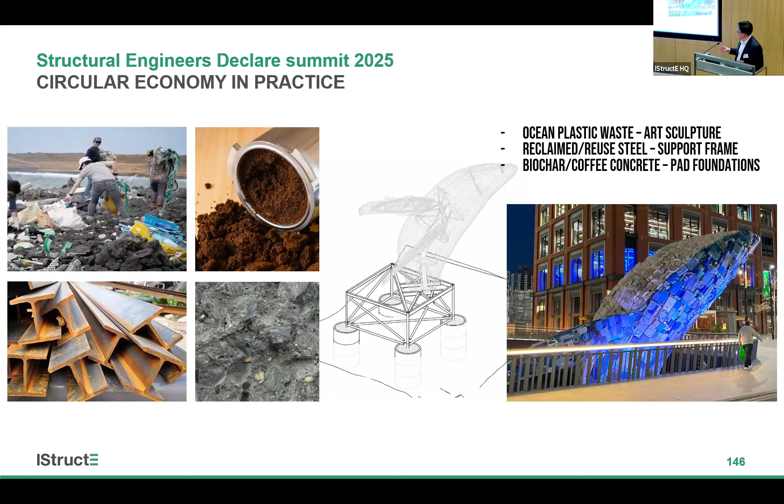Moving on to how can we take that idea of using these innovative materials into the mainstream? So biochar concrete was a great idea, and it's good that we've done it for an art piece, but that's a bit of mass concrete. How do you elevate that into structural concrete? So the only way to do this, and I think this chimes in with what Tom has said, is you need to reverse that thinking. You need to think about the source first, and how do you use that source to get you to design and then into construction.

So we're going about full-scale testing using these innovative concretes. Biochar is one of them. And finding the opportunities to implement full-scale elements and test them. So what you see here is a steel gantry frame, and that was due to the topography of the site. The site wasn't even; it was part of a leftover phase that we hadn't constructed, and we brought this phase forward a lot earlier.

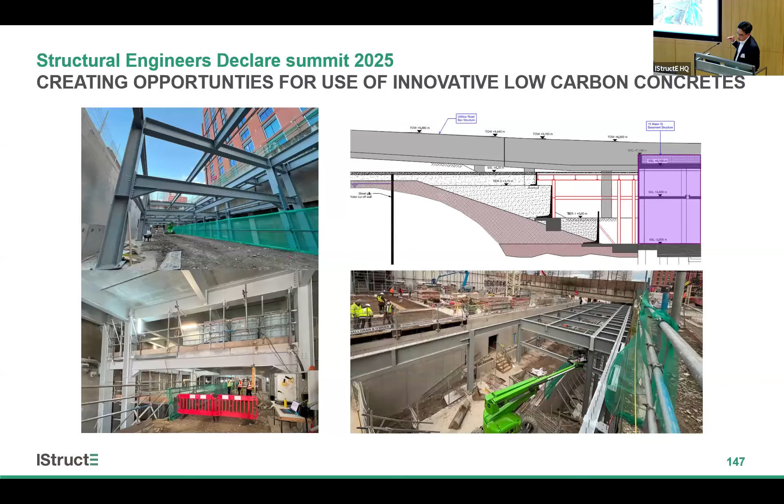You may know it, but this is where the new Hunger Games theatre is going to be opening next week, and this is how we've incorporated a testing rig using this steel gantry. Because of the variance in levels, we had to build up that level to marry up the ground bearing slab and the intermediate beams underneath to restrain the double height columns. It was a perfect location to introduce a testing frame for us to build in some test slabs.

So what you see there is, we've banded together, and this is the key thing. We created a collective. There's 6 consultants working with us, 2 prominent universities, and our supply chain, our contractors, all working together to come up with this strategy.

The other interesting one here, as you can see, we've also introduced graphene as one of the mixes, and the graphene here in particular was created from old used tires. So that circularity story really flows through in terms of the ideas and the way in which we want to direct our projects. So all the effort into preparing that has now created this amazing patchwork of different types of concrete and different types of slabs.

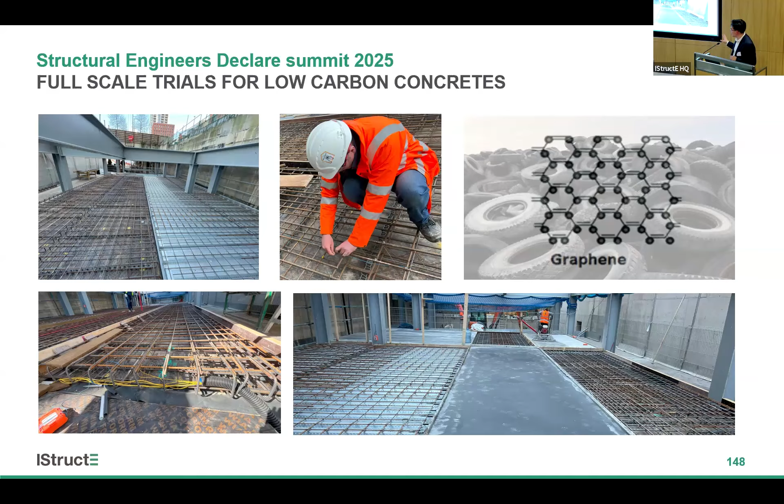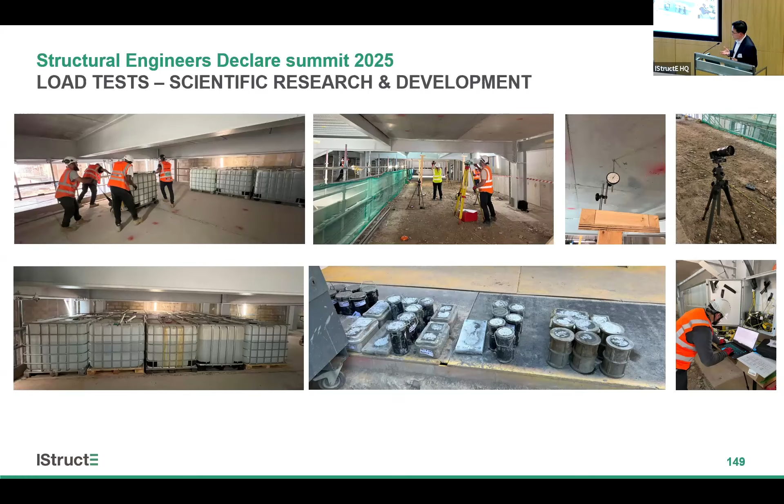And the effort in delivering this is no small feat. Arranging all the people to do the testing, to do the load tests, the arrangement that we've done, we've got a suite of cubes, cylinders, taking their concrete strength, their cylinder tests, and various means of us monitoring it. So we're getting this full insight of how these new mixes are behaving, so that we can then unlock through data and provide that technical assurance to our engineers to say, look, these are how these materials could be designed for our projects.

And we're not stopping. Every opportunity that comes, we look for how we can introduce these ideas. So this is another project. So where we were testing suspended slabs, we had the opportunity, and we took the opportunity to instrument deep 2-meter thick slabs to test these novel mixes, to get the understanding of how they also perform in the basement environment, with thermal effects, hydration, to unlock that through collecting data.

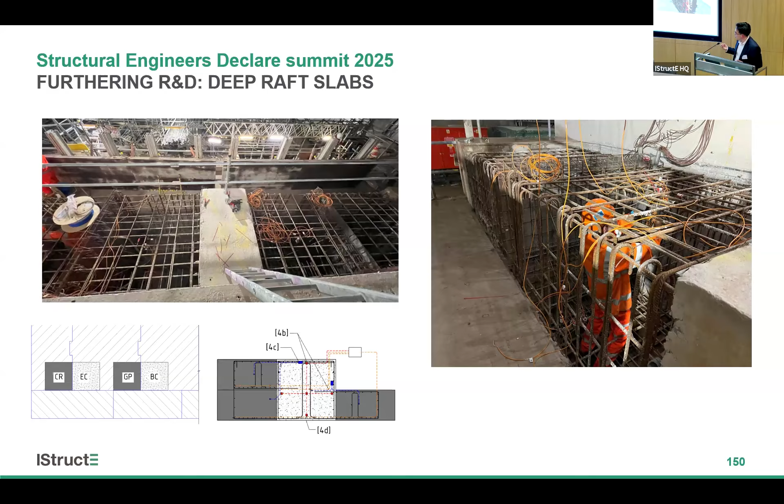So our route map, in terms of how we see to unlock the potential of these new materials, is obviously to address the technical aspects. BS Flex 350 is a great framework in which we can try to navigate that to help our consultants. Scalability is a key aspect, because we need to partner with suppliers who have the capabilities, the investment to scale up, because our projects require a lot of materials.

I mean, it's great that these startups are innovating, but to be able to produce it in the time frame that we want, to really hit net zero and work effectively, we've got to partner with people who have the right resources. And contractors are also a fundamental part of this chain. So they need to be familiar and used to the way in which these concretes behave, the workmanship, the quality, the finish, and engaging them is vital to unlocking this route to market.

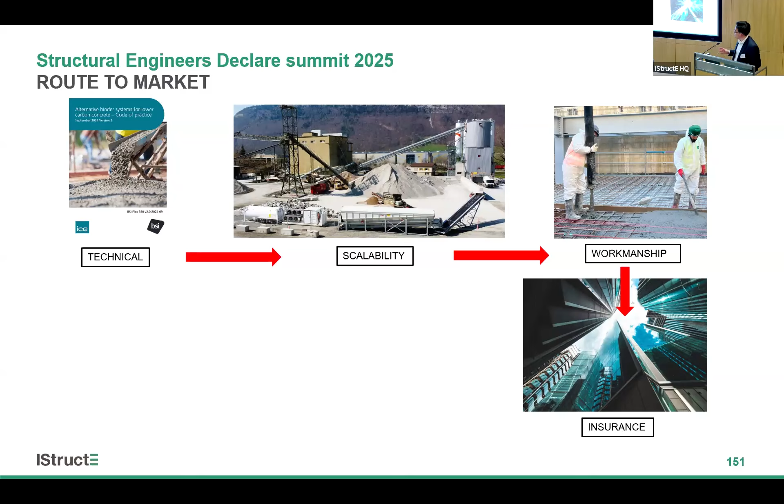We've also mentioned insurance. The great thing about Canary Wharf, we have that pull power to say, look, we are innovating, we're doing these R&D initiatives. We want you to be part of this journey. So we've engaged with our insurers. They've been very proactive. They've been really interested in what we've been doing. And they've been giving us really interesting insight into their views, their risk profiles, the things that they're concerned about, for us to then fine tune and tweak what we're doing.

And then obviously, how do we showcase it? So the best way is doing it through our iconic projects, to deliver it in these tall, high rise buildings, to show that this is a way in which we can bring it to market.